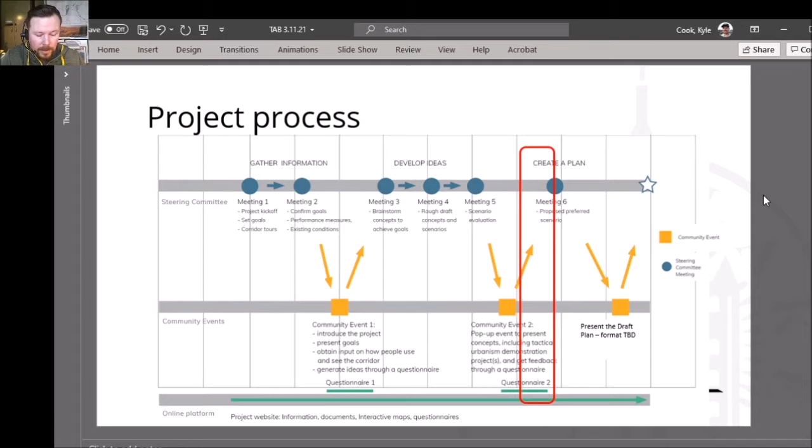So the projects may be compartmentalized. You might see an intersection improvement over here, or a new mid-block crossing over there, as opposed to a complete corridor reconstruction, which we'd love to do, but obviously that's an extremely expensive approach to making improvements along a corridor like this. So right now we're in the process of promoting the project.

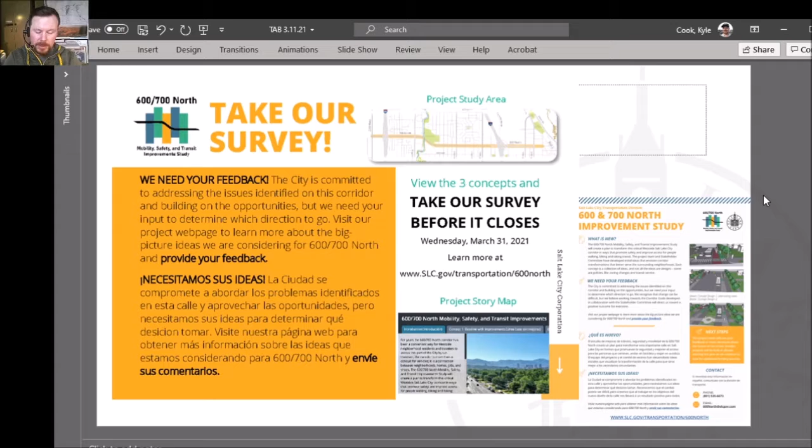We've got a story map out. This is fresh and current content, as well as a survey to gauge people's responses. So we've got these kind of big picture ideas that I'll share with you here in a second. But the survey is open till the end of March. It's been open since the beginning of February, so we have kind of an elongated comment period, and it's bilingual. So we're making an extra special effort to make sure people have the time to speak their piece and can access it in Spanish as well.

So I'm going to give you a quick walkthrough of the content that we have for your information, and it'd be great, obviously, for you to take the survey. You're welcome to share your questions and concerns directly with me, and tell your friends, tell people that you think would be interested. Word of mouth is always a great way to get the word out. So SLC.gov/transportation/600North.

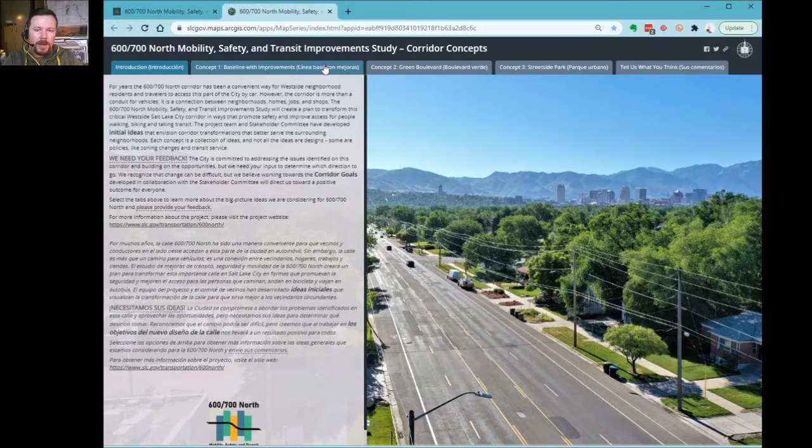We've got our general website up here with the trail of breadcrumbs documenting the project process, as I mentioned. And then here's our story map, which is embedded in the website. So you can click this button, which I recommend, to take it into a new browser tab, so you get just a little bit more elbow room as you're navigating the space. We have each of the concepts shown across the top in tabs. So concept 1, what we're calling our baseline with improvements. Give that just a second for the images to load. And we get a nice plan view section here.

This is what we call our baseline. This is kind of the option that's got something that everyone can like, in the sense that it maintains vehicle travel lanes in each direction, but it does rededicate a lot of the street space to things like a buffered bike lane, transit stops. In this graphic, we're showing island transit stops. Obviously, right now we don't have transit service running up and down the corridor.

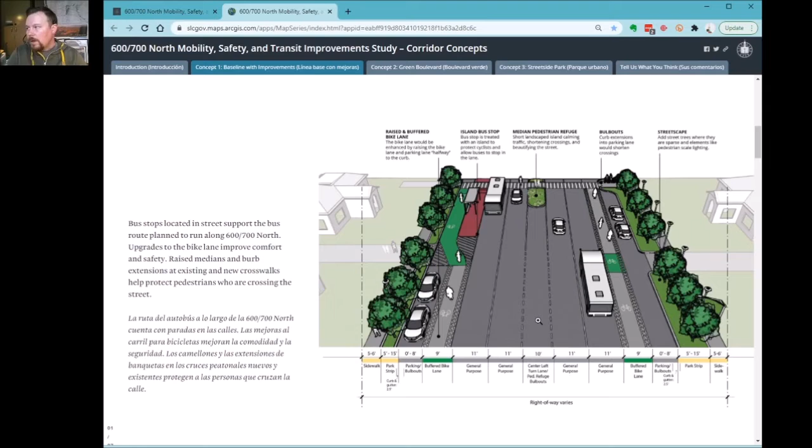That's coming in fall of '22, which, just as a quick side note, was delayed due to budget shortfalls related to the impact of the COVID pandemic. So while transit service that we've envisioned on the corridor is going to be delayed, it's still coming, and we're still excited about it. So baseline with improvements shown here. We've got some nice visuals, and I think the video should be coming through. This is taking that plan view rendering and creating a three-dimensional fly-through.

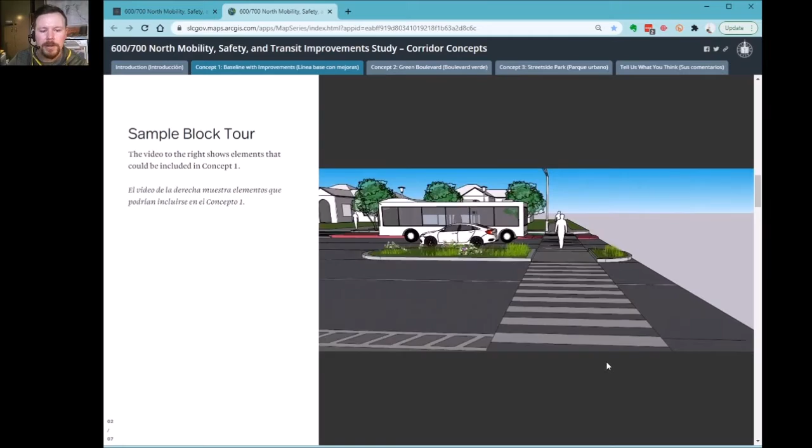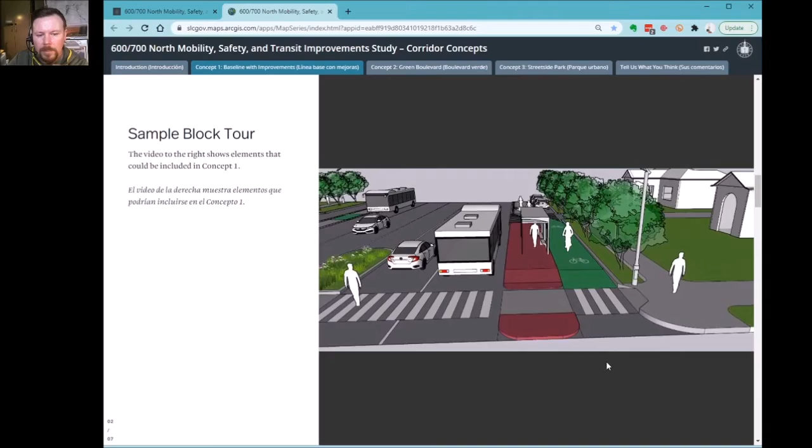So this shows on-street parking, curbside, which we think will be important for a lot of people since it does have so much residential directly fronting the corridor, particularly between 8th West and Redwood Road. Mid-block crossings are something that we'd like to see more of along the corridor, perhaps with landscaped medians to add some greenery as well as that pedestrian refuge.

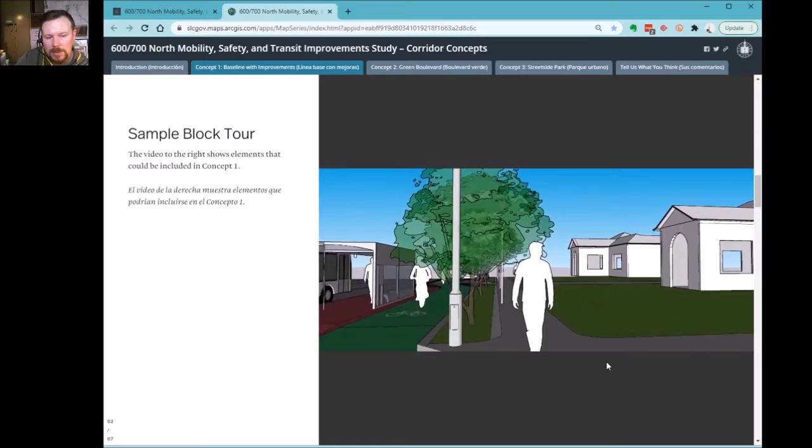Here we're showing how that island bus stop could look. This is pretty consistent with the Typologies street design guide, where it takes the protected or buffered bike lane and runs it alongside the curb to mitigate the conflicts that we oftentimes see when buses have to cross across the bike lane to access a curbside stop.

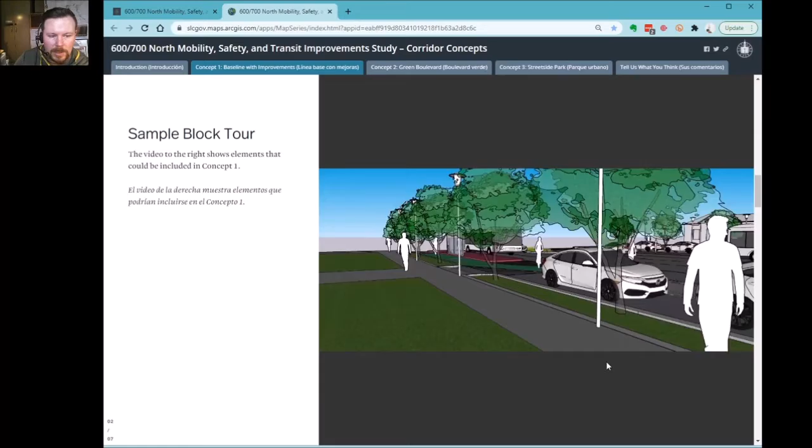Okay, and I'll just walk you through some of the other features that are within each one of these. It's vertically scrolling, and this content is kind of custom tailored to each concept. So again, we're in concept one. We're showing different streetscape amenities that might be specific to this particular concept, but some of these are broadly applicable too, right?

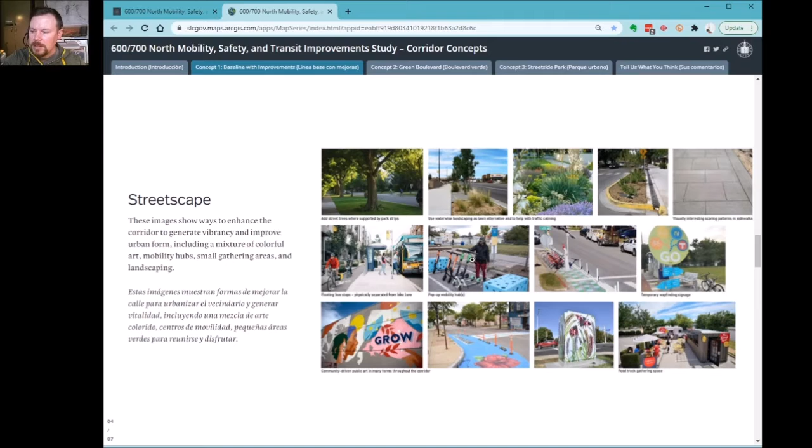So additional park strip trees, some bulb-out landscaping, micromobility elements, even just some basic artistic wraps for signal controller cabinets can start to make a difference and create some identity and just some nice aesthetic upgrades to the area.

The I-15 interchange is something that we've heard a lot about. In reality, these options in and around the interchange are sort of independent of what we do along the whole of the corridor. And this is because it's not a city facility. This is a UDOT facility, and so we're outlining different ways we might like to see changes to that interchange, and working with UDOT to realize those.

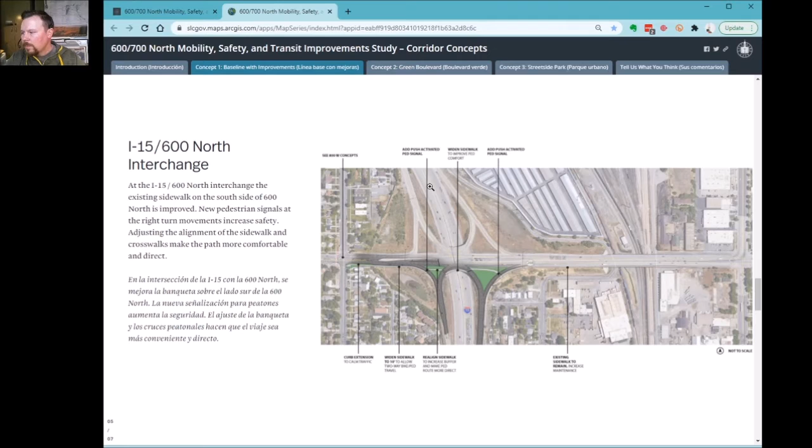And now I'm kind of getting lost a little bit here, but one thing I'll show you is you can click on these concepts and vertically scroll to a window pane where the concepts are side by side, and it's a little easier to visualize what the difference is between the alternatives. So with I-15 and 600 North, it sort of follows the pattern of least intervention to most intervention, where we're looking at doing some modest sidewalk improvements.

This option actually looks at modifying the radius of the curve to discourage speeding around that corner, and then the third option would be to add an additional bike lane on the north side and potentially some path-like crossings at the ramps. So let's see. I'm getting a little lost here.

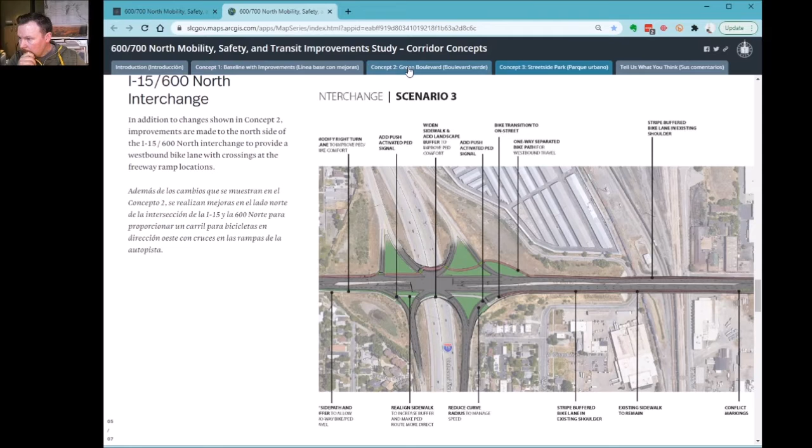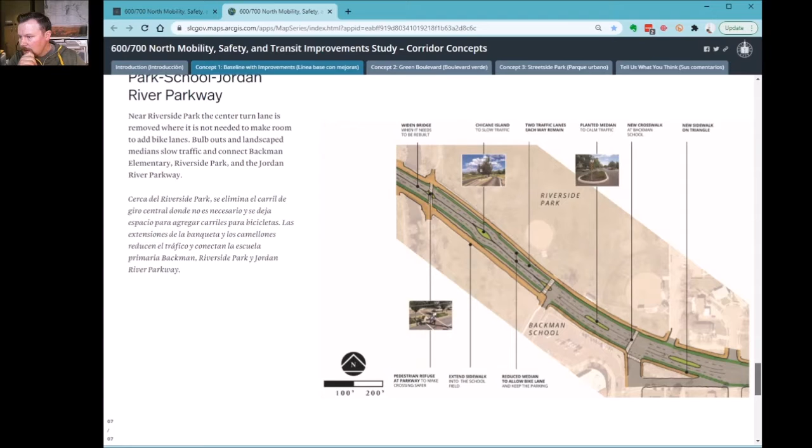Let me go back to vertically scrolling through concept one, some ideas for 7th North, and some visuals of a key activity area near the Backman Elementary and Riverside Park. We did little vignettes in and around this area because we feel like it's such an important element of the corridor. It's a big destination locally and regionally, and it's got a lot of nice civic uses. And so for each one of the concepts, we did sort of an illustration of how that might look and interact and interface with the surrounding land uses there at the park.

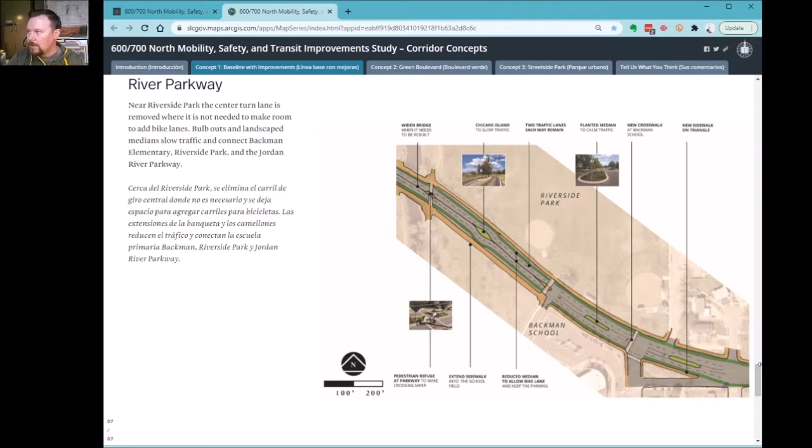So let's step through concept 2 briefly. So this is definitely a more transformative approach, where we'd actually reduce the number of vehicle lanes in each direction. Now that in and of itself has resulted in a lot of concerns expressed through our survey and otherwise. This corridor, I'd say, is kind of in a spot where it can function as a single lane in each direction. It's kind of on the upper threshold of where we'd want to do that. The ADTs that we were seeing were around 13, 14,000. So it's still a very busy street.

Reducing the lane in each direction was done last summer for utility work. I think it was, now I'm going to forget who was the utility company, doing a gas pipe replacement project in the center median. And they had lane closures down to one lane. And we were out there watching it and people get through just fine. So this is an example where there's a little bit of a misconception that you need two vehicle lanes in each direction to get traffic through, and that's not really the case.

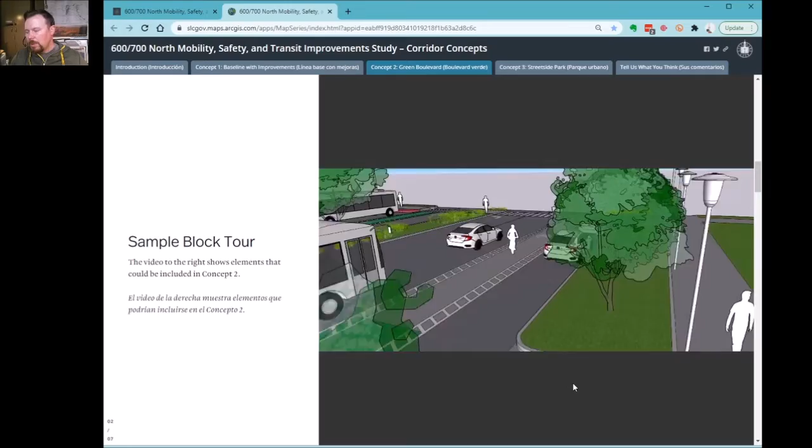So what do we get with that extra space? In this graphic, we're showing a larger landscaped center median, which creates visually more greening, opportunity for mid-block crossings, general traffic calming. It really would have a pretty dramatic impact on the look and the feel of the corridor.

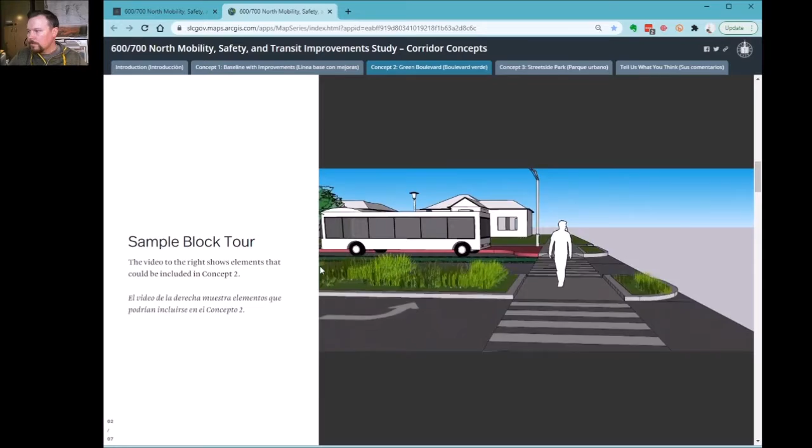Okay, I'm going to pause there for 1 second.

Okay, and then the third concept is this streetside park concept. So this is probably applicable for shorter segments near Riverside Park. I don't think we'd envision doing this in really long segments or along the entire corridor. But it creates a space that sort of extends that park node, creates a space for people to walk and gather. We would be able to incorporate a separated bike path into this area or into this repurposed street space.

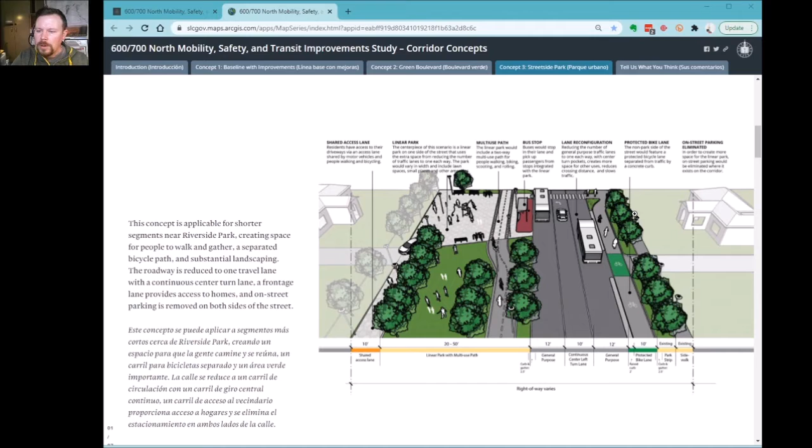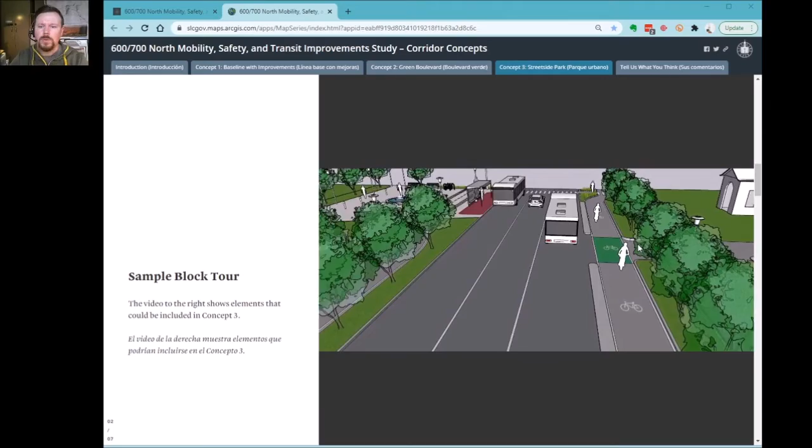The road cross section is transformed into one travel lane in each direction. And thinking about how residents would access their homes, we'd look at doing some kind of street frontage road or something like that. So, obviously it's a little bit more radical, but we wanted to think outside the box and think creatively about what to do with some of these really wide streets, particularly in the Fair Park and West Side communities where we have these very expansive pavement cross sections, and just trying to think creatively about what could be done here.

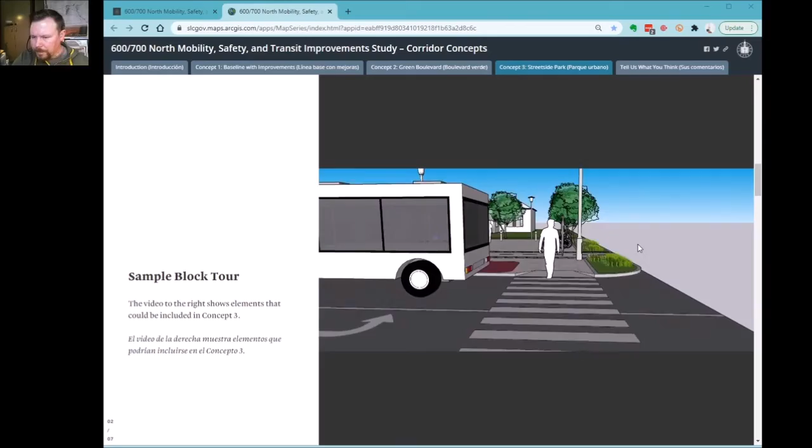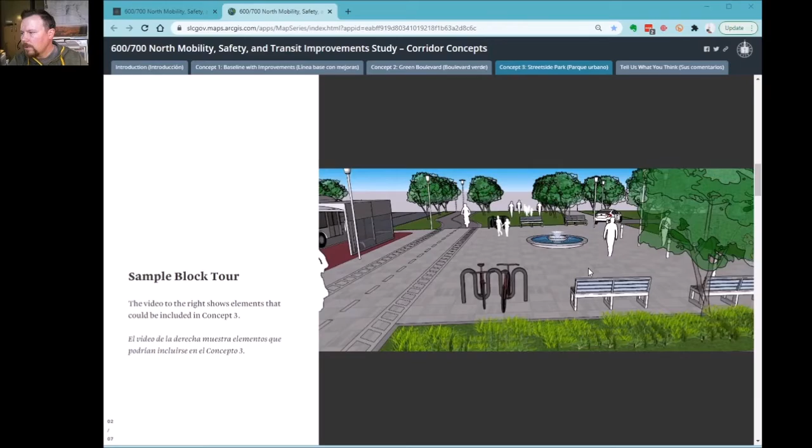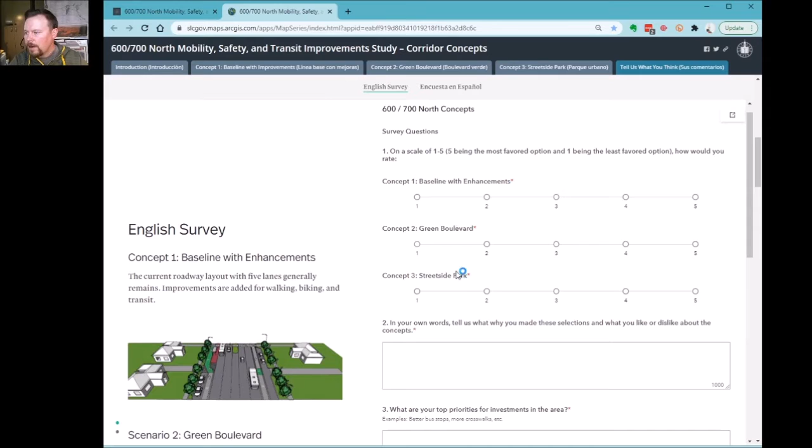So again, just the fly through graphic showing that plaza space, how that separated bike path could integrate in with the transit stations. And then last, but very importantly, we've got our survey mechanism here. So we're doing surveys in English and in Spanish. This is just a quick glance at how that looks. It's not a long survey. We're mostly just asking folks to rank their preferences, give us some open-ended feedback about what they like, what their priorities are, and asking for some specific input on the use of temporary or quick build materials.

And this was inspired a little bit by the experience we had on 6th North and 12th West back in November, where we felt like that was a pretty successful implementation and just generally promoting the idea of investing on the corridor. Interestingly, a lot of the feedback that we got wasn't particularly favorable towards the temporary materials, soft hit posts, even just the level of permanence. Some people felt like it wasn't out there long enough for them to really even adjust to it being there. And so, this is trying to get a little bit more insight into that question of do we try to build a few signature projects or try to spread the wealth around a little bit more, potentially using less durable or less permanent materials. So it'll be interesting to see how this comes back.

Right now we're tracking at around 350 completed comments, which is great. That's actually more than we had last summer when we were doing the initial open-ended comment period. But please take the survey, share the survey. We're looking at wrapping this project up fairly soon. And again, this is wrapping up the study. The study sets the trajectory for the direction of the investment. We want to have the vision, so as we're doing things moving forward, we're doing phasing that's sensible and goes towards the ultimate build and doesn't result in throwaway work. Okay, and that's what I have for 6 North. Pause.

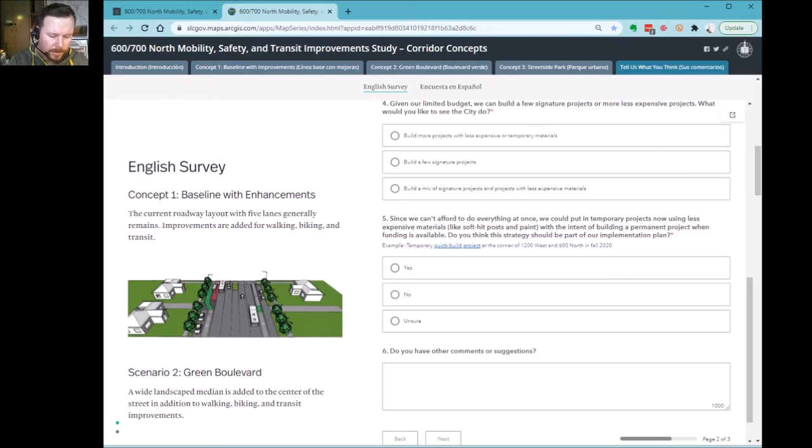Okay, and I'm looking at the timestamp on my video, and I'm 16 minutes in, which is bad because I obviously wasn't very efficient with the time I had. Only talked about one project, so let's go fast now.

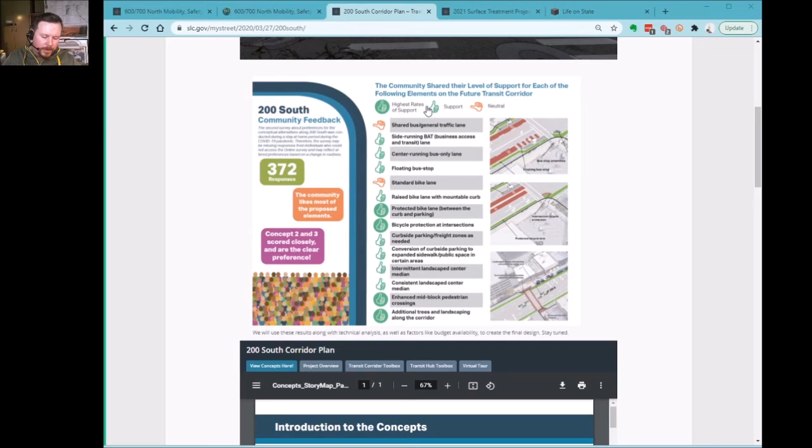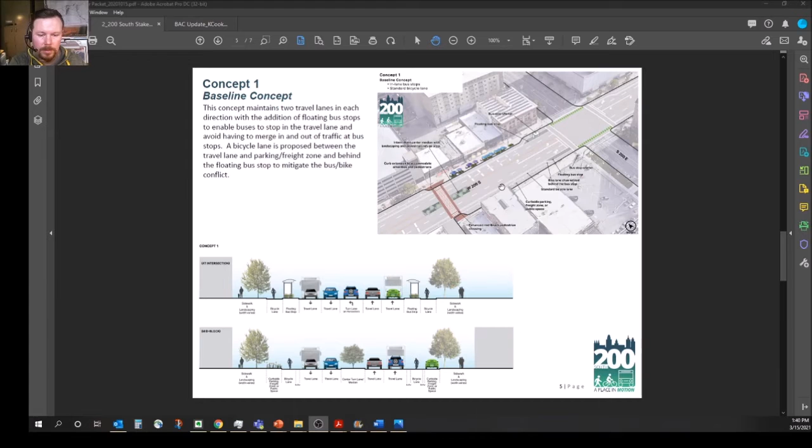Let's talk 200 South. I've got the web browser on the project page. I'm sharing with you an infographic that shows a quick summary of the results of the survey that we conducted last November. Okay, and just to refresh your memory, the baseline concept was more or less in-lane bus stops with some good things, mid-block crossings, those sort of things, but not otherwise providing designated priority to the transit as done in concept 2, where we basically define the outer lane as business access and transit priority lanes, so BAT lanes. Again, driveways can turn in and out of these. They're not restricted with curb, so they can be temporarily used by vehicles accessing the curbside parking or that sort of thing, but are otherwise supposed to be primarily used by bus transit.

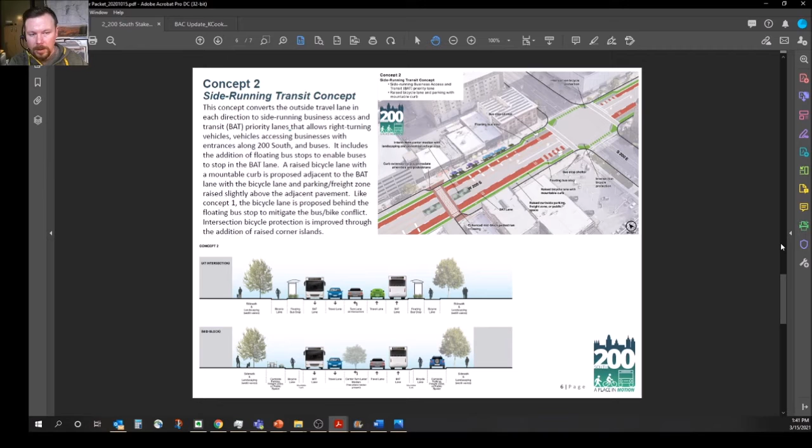And then concept 3 was placing those transit lanes center running. So where we ended up, again, there's lots of considerations that go into this. And I think a lot of people will be interested to see how we arrived at the solution that we're moving forward with. But the punchline is side running transit lanes make a ton of sense for this corridor. It provides us a lot of opportunity to do the walking and biking improvements that people really liked about the project and liked about the center running transit. But what ultimately is really important to keep in mind is that we have a lot of buses using this corridor.

So we have a lot of frequent buses coming through, combined with the fact that these are not buses that just run from one end to the other like the Route 2. We have buses that run on 5th South, buses that run on 9th East. We have buses that run to Sandy. We have, in the future, potentially buses coming on the corridor from the 5600 South route. We have new frequent transit service that I referenced earlier coming from the Rose Park, Fair Park area on 6th North and 10th North. That'll likely be terminating or running on 200 South for some period of time.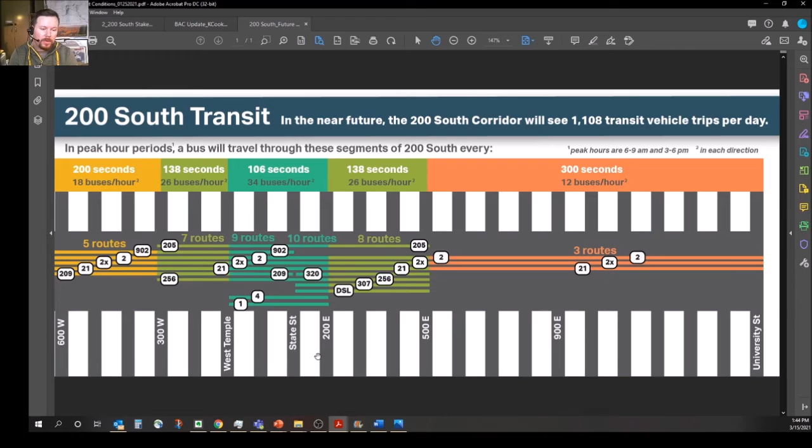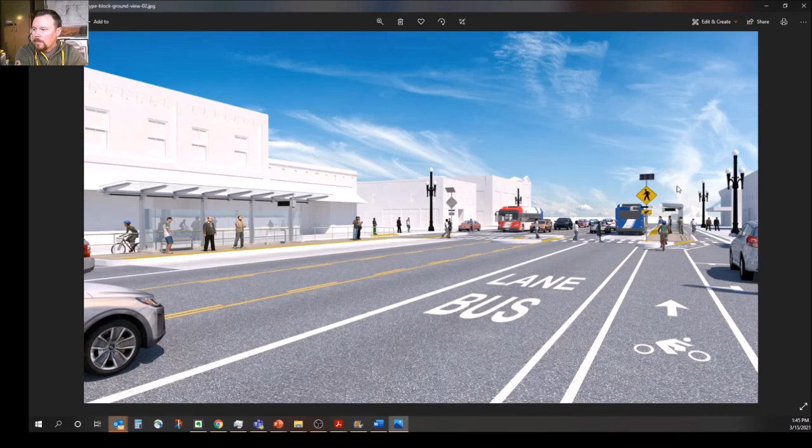Lots of details to be worked out, particularly around how we treat the conflict area with the pedestrian crosswalk and our bike lane, where we're bending it behind. There's a lot of best practices out there. I know NACTO is a great guide, and there's other cities that have done this. We don't have a lot of precedents here in the state, and so I think we're just trying to think carefully about how we design these, what works good for the project here on 200 South, and how we might use this as a template for other corridors and other bus routes. Just a few other views of how that looks.

Okay. So parting words on this one is we're transitioning to final design, where the devil is in the details. We're going to be working out a lot of these questions about how to deal with conflict areas, how to deal with intersections and the right turning conflicts, for example. So more work to come on that. The big picture plan is to have a contractor ready to go for construction in the 2022 construction season. So we're moving pretty quick on this. This is one that's going to be under construction really soon. So we're excited about it, and more to come on this.

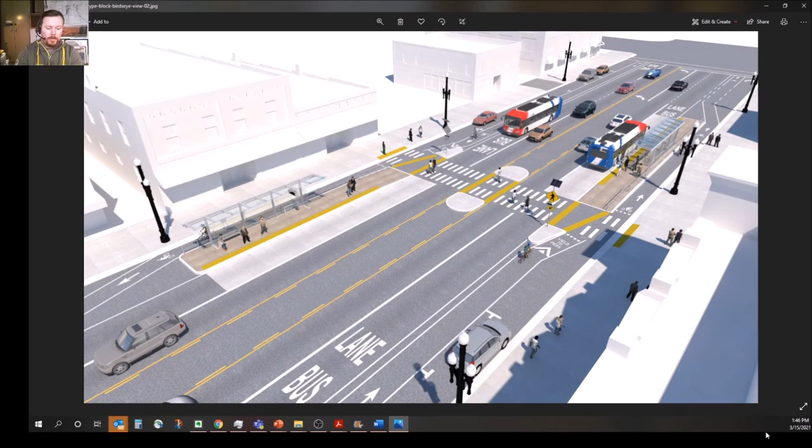In other news, we've got some surface treatments that we're looking at doing. Now this is really common for the city to go through and resurface streets programmatically. Year after year they do this. There's a handful of streets that we're looking at to make some striping modifications. Oftentimes, as in the case of 10th West and 2nd East, these are streets that are in our bicycle and pedestrian master plan, designated as protected bike lanes and separated bikeway facilities. So these are corridors where we're actively thinking about how we might put back the lane striping after the maintenance activity in the way that we want it. Usually these projects don't come with a lot of capital funds. They're not adding modifications to the curb and gutter. Generally, it's just what we can do with striping or some basic interventions. But this does lay the groundwork for capital projects to follow.

And 200 East and 300 East are both projects that are relevant to our Life on State Bikeways project. So I just wanted to give a quick plug for that. We've updated the website to merge the 6th to 9th South implementation project with the Bikeways study. And so we've got really a home for the project. This doesn't have a lot more content on it right now, but we are trying to talk about the resurfacing of these corridors, also making a connection to the Life on State Bikeways study, particularly for corridors like 200 East and 300 East. There's some other ones on here though.